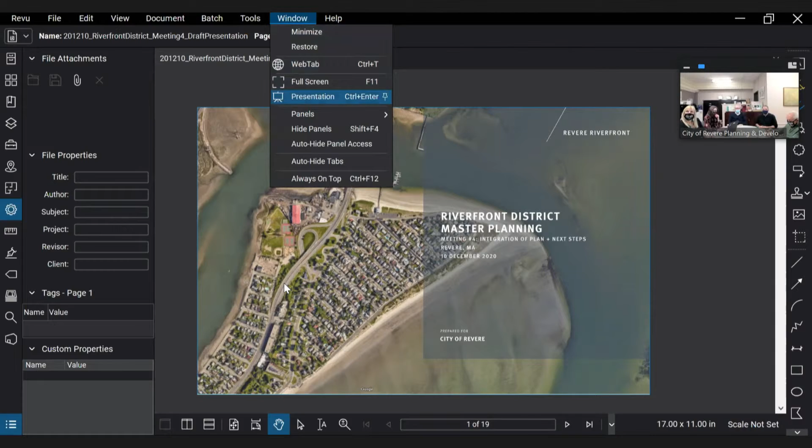It will soon be all yours. You should. All right, I was on mute. Oh, there you go, okay. We're all guilty of that.

Tonight, like we have done in the previous meetings, we're going to start off with what we heard last time, the key takeaways and how we addressed those. This being our final meeting of this group of 4 meetings, we're going to circle back to the overall master plan. We've broken things down at this point into components, and that's important because there are a lot of interdependencies in these different components, and we've tried to tie together the things that would potentially be funded or built together. Then finally, we'll talk about the steps to achieve the vision and the next steps we're taking. This is really the fact-finding piece that allows us to put together the master plan to move forward.

Last time we presented a new plan and moved some pieces around. Overall the programming of the park was pretty unanimously appreciated and liked. The one real big issue was the dog park, which we had moved closer to Thayer, and there were some concerns from the neighborhood, so we've taken another look and come up with another location for that.

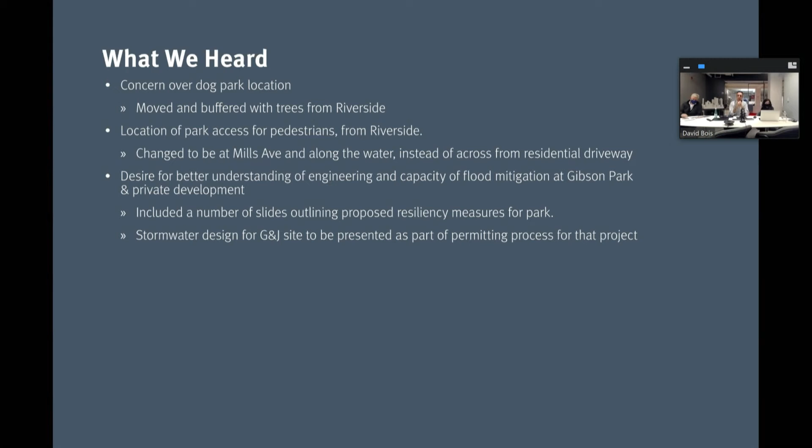So, as I mentioned, we have updated the plan a little bit. And Sean, why don't you walk through the changes, the few changes that are here?

Yeah, so I guess I kind of learned my lesson last week. I do want to take just a minor step back. I don't want to focus a lot on this. We can talk about the changes, but I know there's probably at least a couple new faces, and a couple people here tonight that weren't with us last week.

Throughout the park design, probably the big move, which gives us a lot more green and a lot more real estate within the park, was the reconfiguring of the on and off ramps off of 1A. Instead of the two big loops, this is all being developed and studied in conjunction with the new General Edwards Bridge. So as you look at the roundabout, it's the central feature, but what we really get out of that opportunity is some additional usable, programmable park space, which is what you're seeing in the upper right of the roundabout. It's a great opportunity for the park and the neighborhood itself.

That location, in addition to getting more green space, also allows us to really create a new front door, and it is the primary access into the park itself. It reroutes any traffic to Gibson Park that's not direct neighborhood traffic, to be accessed from Route 1A.

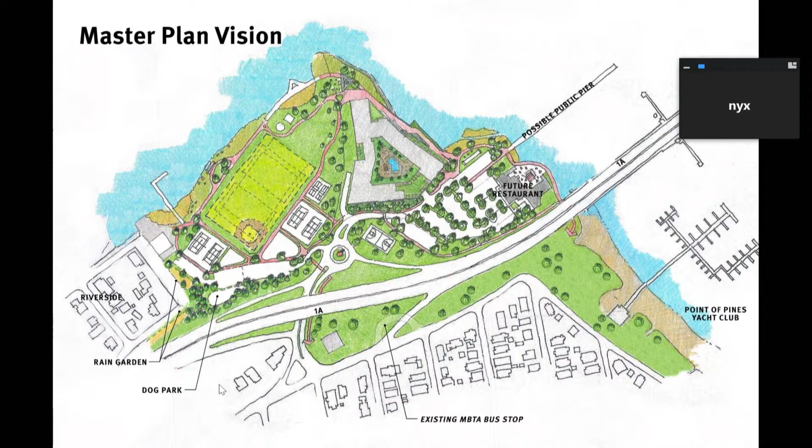We wanted to talk about the components, not in any particular order, because as we talked with the city, as things move forward, there's going to need to be flexibility about what could happen when. But there are definitely some pieces that could happen very quickly. In the community boating, there's a lot of momentum there.

The community boating is here. It's a renovation of the existing building, making it more resilient, more attractive to the neighborhood, and more welcoming. The thought is that facility could have restrooms open to the park as well. It's a great opportunity—a facility like this for kids and community, with classroom events as well as boat storage, would need those kinds of facilities, and designing them in a way that could be shared with the park really is a benefit to both.

So we just have some images of the activities, some images of the needs for the park and for the building, and some images of what the look and feel could be. It's an idea that the building itself could be renovated, have art, and be a very vibrant part of the neighborhood.

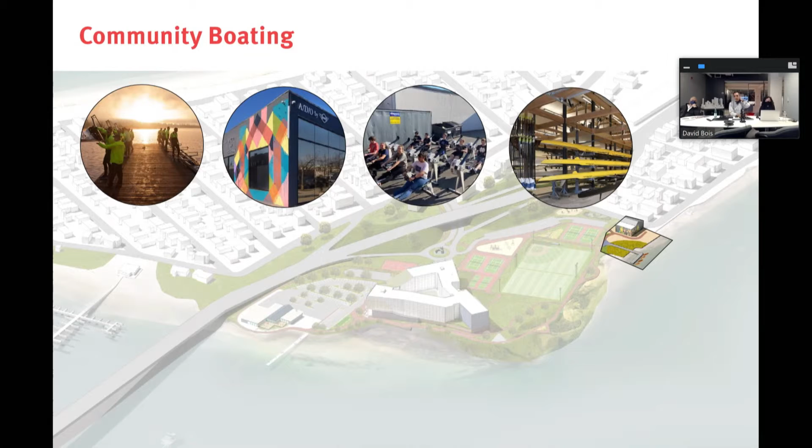The next component we want to talk about is really one of the major components, and you can see how much of the park area it takes up. It's the multi-use field, some of the tennis courts, some of the parking, but what's really important here is the stormwater management system. I'm going to let Jay and John talk about that in more detail.

Thank you. Nice to be with everyone again tonight. Last week people were looking for some more details—let's go back to that previous slide. To propose interventions with the stormwater system, we really need to understand what's going on in the existing condition: where the flooding's coming from, why it's happening.

So to provide a better detail of what we looked at, we took the Google Earth aerial and marked it up with the tributary drainage areas. That means looking at the topography—water just goes from high to low points. So we found where all the high and low points are, and looked at how, with the existing infrastructure on site, the water discharges.

There are really 5 tributary drainage areas within our study area. Technically there's a 6th, which is the North Shore Road, but that handles itself—it's got internal drainage and takes it away from our system. What we have is all catch basin and pipe system, your conventional drainage structure, where you capture the water, get it subsurface, and send it away till you get to an outfall. That's how things work all over the nation.

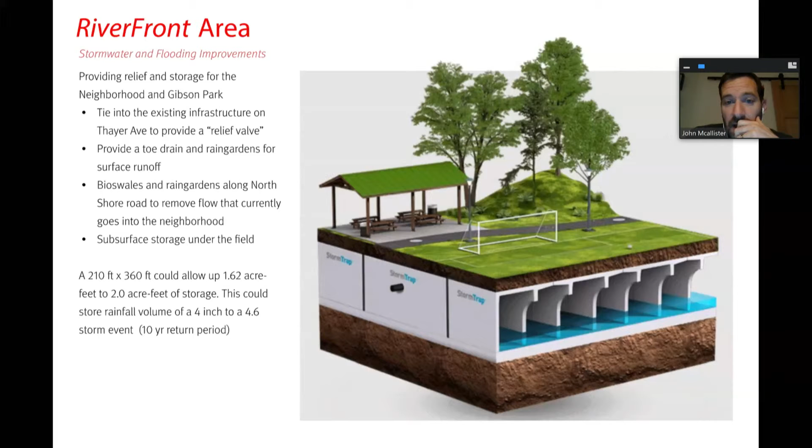In addition to that, we're going to have a toe drain and some rain gardens. We're also going to take off about 14,000 square feet of drainage area from the embankment coming off of North Shore Road that currently goes into the neighborhood, across onto Hayes. We're going to take that off with bioswales and direct it into Gibson Park and into our rain gardens and subsurface storage. So this slide is showing three different setups.

The top is what exists currently. As you can see, when the Pines River is low, at the lower end of the tide cycle, water goes into the catch basins and through the outfall and is able to freely discharge.

However, in the middle, as you can see, as the tide rises, there's a tide gate on it, and it's a flap, so that when the tide is open it allows discharge, but when the water comes and pushes pressure on it, it doesn't let the water come back into the system and flood the neighborhood. It doesn't allow the discharge. So we have a backup into those catch basins, into our pipes, and it has nowhere to go because it can't discharge into the Pines River. So it backs up and starts to flood Mills Ave, Thayer, Hayes, all that area.

So what we're proposing is, on that bottom slide, and it's a very simplified diagram, when the tide gate is closed and there's nowhere for the water to go, if you put in another drainage pipe into that catch basin, it can then go into our subsurface system, be pumped up, and you have a lot more storage area.

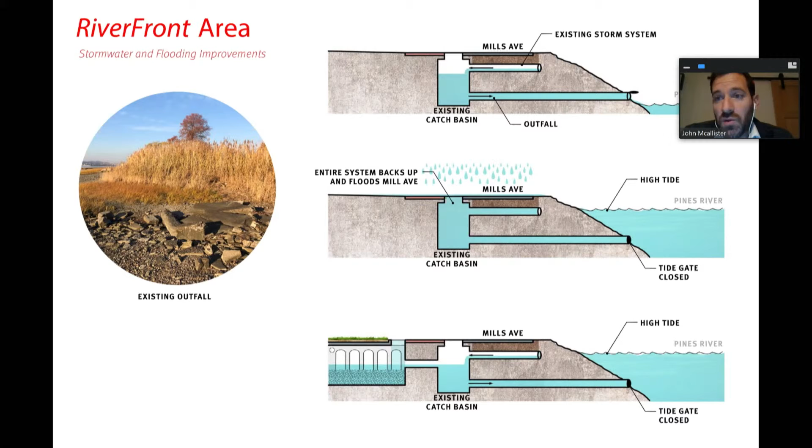Now, if we can go to the next one, how much storage area do we have? We have about 1.6 to 2 acre feet of water.

Now, what that means is if you looked at the boatwork site today as it is, that's enough storage that if there was 15 to 18 inches of water on that site standing alone, that's how much we can contain underneath this field here. That's what the big cyan picture is showing here. So it's a significant amount of water when there's currently nothing.

So again, in the current time, when it's high tide, there's nowhere for it to go. It just backs up to the lowest points. Here, we're able to move it, put it to a safe place where it doesn't have as much damage. We can get almost up to a 10-year storm. And that's just one of the pieces we're going to be proposing to deal with stormwater, with floodwater, and with resiliency.

So as you can see throughout here, I talked earlier about removing some of the drainage from North Shore Roads, and at the bottom, you'll see the bioswale. That's going to direct the water away from the neighborhood and towards our stormwater infrastructure where we have rain gardens, and we'll have overflows so we can go into our subsurface storage system. We'll have the toe drain.

John, Loretta Centra does have a question. Frank also has a comment, and I have a question as well, which is that the capacity under the field is a function of the grade level of the field itself. Conceivably, if we raise the field somewhat, we could increase the capacity. Is that correct? Yes. It's not to infinity because you're in the floodplain, but yes.

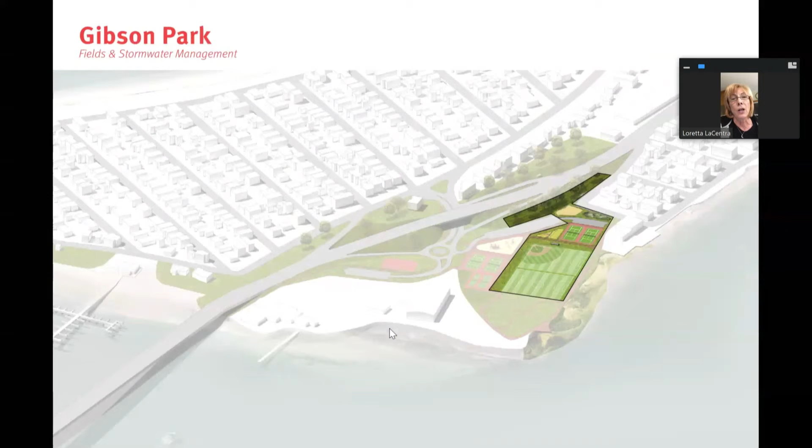What we have at the intersection of John Ave and Mills Ave is an outfall pipe that runs the length of John Ave. It actually runs underneath North Shore Road, underneath a landing that is currently in a state of collapse, and it is crushing that outfall pipe. We've been, and Frank, you may be aware of this, asking about this for years as to what can be done, because once it collapses, it will crush that outfall pipe. Yeah, North Shore Road will flood, because North Shore Road drains into that pipe.

I'm also aware of a tidal gate that you mentioned at River Ave and Mills Ave. I wish Elaine Hurley, if she's on here, could help me out, because Elaine, you've told me that floodgate does not operate. They installed it. Elaine, do you want to clarify? And then Frank has a comment as well. Elaine?

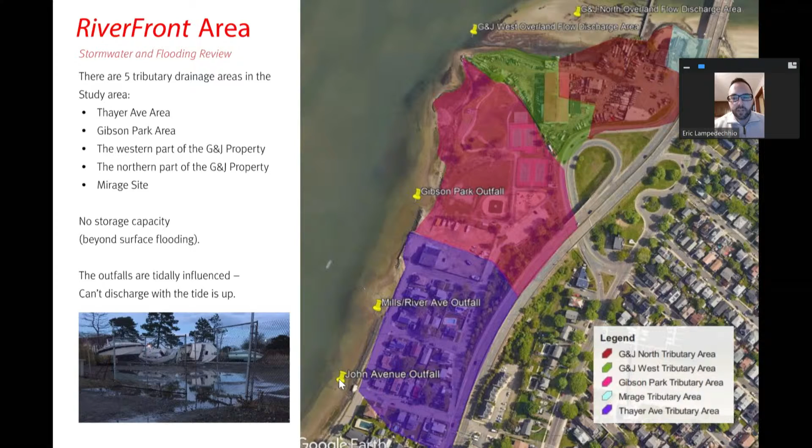Okay, I have another question too - it might even be an opportunity. Could you go to your other slide where it shows the ball field and the projection for the flood storage capacity? Was there any consideration to extend that even more north? So where that subsurface storage is listed, perhaps that could become enlarged by going further north underneath the additional green space?

Yeah, absolutely. So the subsurface storage is essentially a modular system. Most of these chambers are 3 feet by 8 feet long or 4 feet by 8 feet long, so you kind of piece them together like Legos. So you could, however, that's the lower part.

As we talk about raising up the field, that would be slightly lower - it wouldn't be low, but it would be lower. So you might not have enough grade to keep it, because you have to keep these chambers above the groundwater level. So it's something that could be looked at as the final design gets really developed, but it certainly is an opportunity. And we would look at bringing them to the south as well, if we could put them under the tennis courts effectively and shorten up the pipe connection to those as well.

Eric, I think the one thing we want to keep in mind, and it's a really good balancing act, is the placement of those underground structures - they really don't play nicely with trees.

So the ability to get some trees, I think, would be really great for the park, making sure that works with the storm components as well. It's definitely a very integrated system we're looking at here, but absolutely, those are opportunities to expand upon that storage capacity.

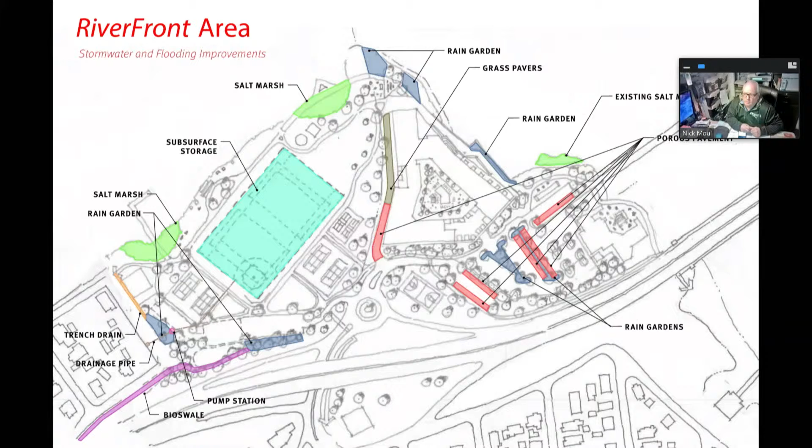Like I mentioned last week, and I had asked John last week, there's no storage there right now, so the storage they're going to put in is going to be a major improvement for this area. Then hopefully with the new project we're going to start talking about next week, MVP, I think it'll work well, and hopefully we can keep the neighborhood happy and not underwater all the time at every storm. But that's it.

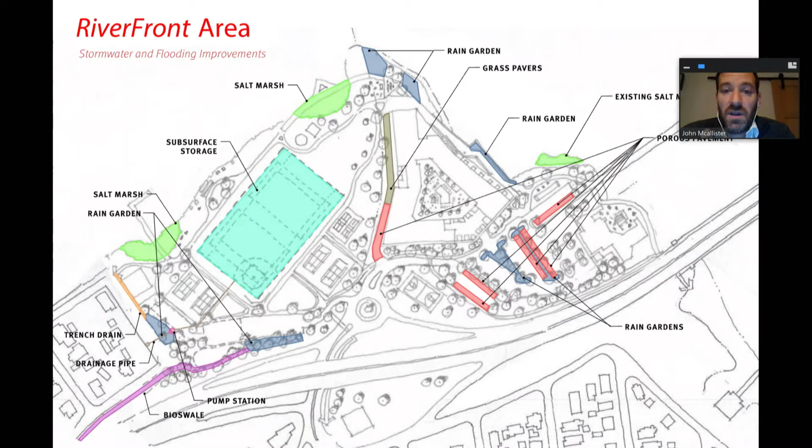I think we can go to the next slide. And if I could just add, as we studied this, we recognized it was a very complicated system with a complicated set of problems. We really pulled all the tools out of the toolbox to apply here. So there's both underground solutions with piping and storage, and surface conveyance of water, sculpting of land, and use of rain gardens, bioswales, and marshes. We've really integrated everything we can to try to maximize the improvements for the stormwater systems.

Yeah, it's a great point. Absolutely.

I want to talk a little bit about the shorelines and the water activation. Definitely one of the goals we heard early on was about the ability - you've got a great, amazing park, it's on the water, but the ability to get to the water, interact with it, and enjoy it from a closer relationship is a little bit limiting in its current conditions.

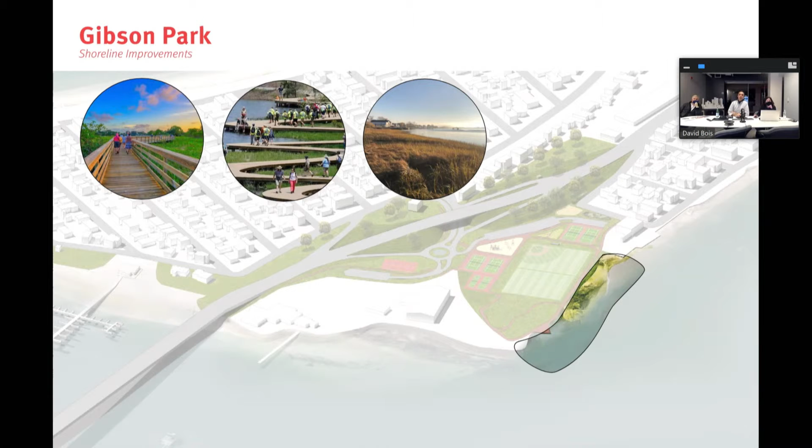So we touched on this earlier, the change in the access from 1A. The benefits there include obviously the additional parkland, but really the major benefit here is the change to the flow of traffic, really making access to Gibson Park available to everyone without impacting one particular neighborhood.

And then, as touched on a little bit, there's an underpass there that will become part of a pedestrian access point for the Point of Pines neighborhoods, and it's going to become the front door to the park. It's also going to become the front door to any development. So treating that underpass with careful attention, whether it's lighting or paint, making it a really welcoming and inviting entry point, unlike what we show in our rendering, which shows a black hole.

But I think the other thing to mention - we talk about paths, but the other thing we'd like to stress, whether through separate bikeways or multi-use paths, is to promote bicycle usage as well as pedestrian access to get to the park, and really keep the community aspect and easy access to it. It's basically an amazing opportunity.

John and David, I believe Eric has a question or comment. Thanks, Bob. I have two questions. The first is the access point to the potential development site and the retail component. Will that access point come down to the rotary? And why did you choose to come down to the rotary rather than leverage the existing access point?

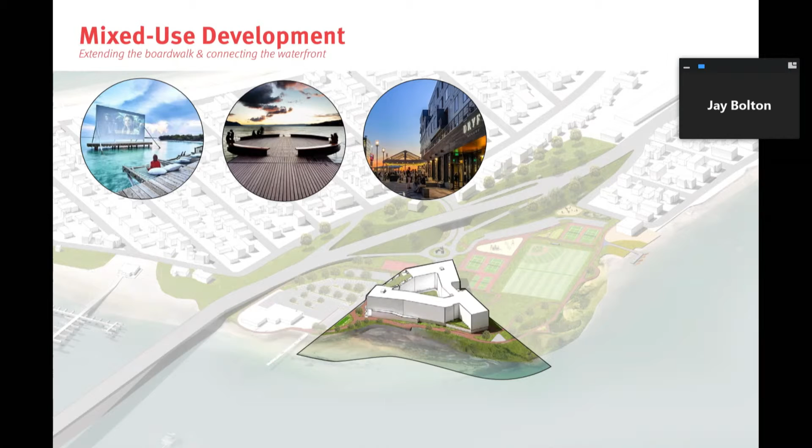How many parking spots, both underneath and to the side, are going to be issued for the building? I'm curious how many spots there will be. Well, I don't think there's been a final determination of the unit count, but it will be sufficient to handle all the residents. It would be in the range of 250 to 300 spaces, let's say. Okay, gotcha, all right, thank you.

Okay, Representative Vincent. Yes, hi, good evening everyone. I just want to share my two things, number one, which I mentioned at the meeting a couple of weeks ago.

The parking, I'm very concerned about it, especially because the Riverside and Point of Pines neighborhoods are really inundated with cars right now. They don't have enough parking as it is. Even though they supposedly have resident parking, it's really not, because it's only from midnight to 6 o'clock, and that would not really help the people in Riverside or Point of Pines. So parking is a real concern to me.

Number two, both Riverside and Point of Pines are very single-family neighborhoods. I love the idea of the park in that whole area, if that's where it's going to concentrate, but I don't understand why we would be trying to put the Pines and Riverside sections of the city together. Why would they be integrated? What would give anyone a reason to go into the Pines? It's a private neighborhood. Why would we want to integrate the new development with Point of Pines or Riverside? I'm not understanding that.

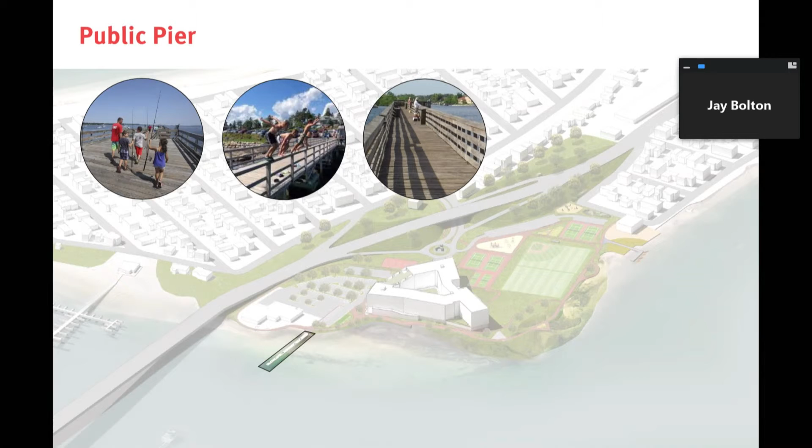Thank you, we certainly do that. I might just note too that the access under the bridge along the waterfront is identified as a potential access because it is an issue that needs to be discussed with the community, number one. But number two, as a practical matter, that can't even be contemplated until the new bridge is in place, which could well be a decade or more away. So it's not an immediate threat if it's perceived as a threat. And if it becomes an opportunity, it will be implemented after the new bridge is up and running.

So Bob Mara, I believe you had a comment as well? No, I think I'm going to refrain. This isn't the forum for a debate about Point of Pines issues. I'd rather hear more about what the developers have to say consistent with tonight's agenda. So I'm going to withdraw that.

Okay, very good, David, it's back to you then. Sure. So part of that private development site and part of the G&J site is actually this public pier that we're talking about. And I know Redgate and the city are in discussions about trying to figure out the best ways to actually develop that, bring that back to life and make that a public amenity as well. We just have a few images of probably a fishing pier because of some of the other constraints on that, but definitely a lot of study that needs to go into that, but that's something that will be coming in the future as well.

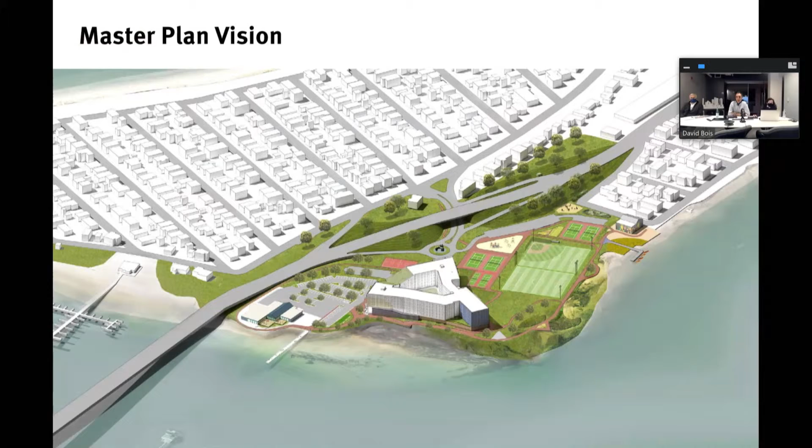David, I believe Lisa Pedersen has a question or comment. Lisa? Hi, can you hear me? We can now, yes, go ahead. Thank you, I want to go back to the roundabout if I could.

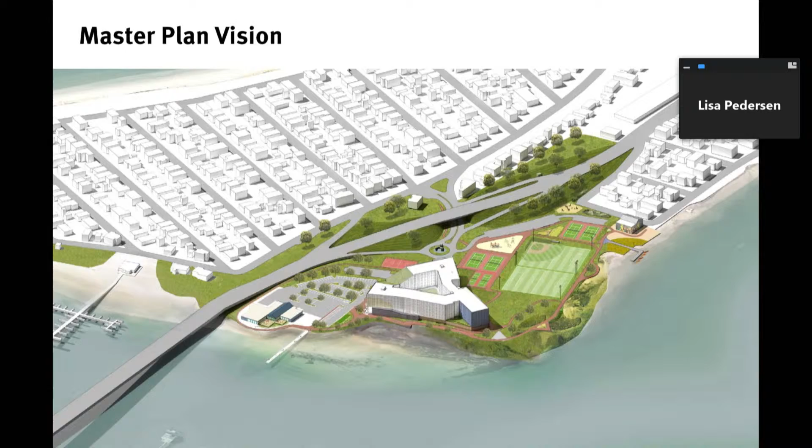Sure. So I think this whole thing is overkill, and I'll tell you why. Because if you're talking about the bridge being elevated 10 years down the road, I think it would be less construction and more efficient if you continue to use your entry and exit that you have right now. You could cut a path, a road from where you guys are down to where the parking at the park is, which would eliminate all these on-ramps and off-ramps in this roundabout. And it would make everything safe. You wouldn't have to decelerate for the state.

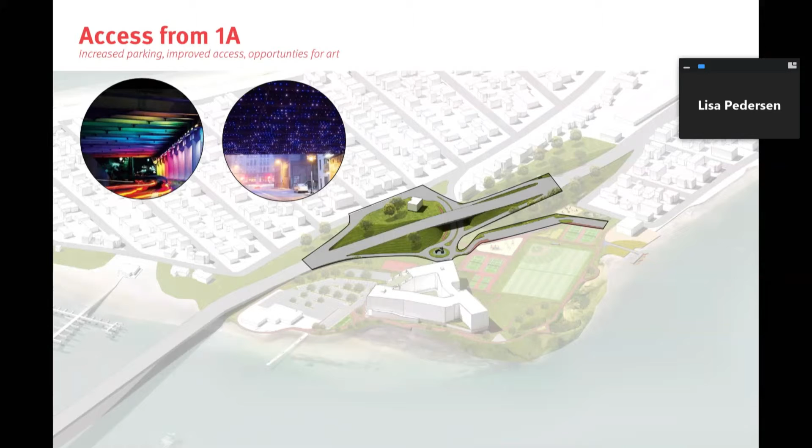And as far as the traffic study that you did and the people leaving from the roundabout southbound, hopefully exiting before Thayer Ave and the neighborhood, that's a blind downhill 45 mile per hour slope. At the bottom of it, about a block away, is a crosswalk. So everybody on the other side of 1A that's going to take the bus, especially now that they're going to eliminate that other bus stop, is going to have to cross that crosswalk in front of a bunch of cars that already aren't looking, and now there's additional cars that aren't looking. Not to mention that when you did the traffic study, all the people on the beach side are now going to have to come under that bridge and go down that same thing. So I don't know if that was included, but that's a lot more people, and I don't see the necessity of it. I think everything's set up just fine if you would just expand the road from your entry straight to the park parking.

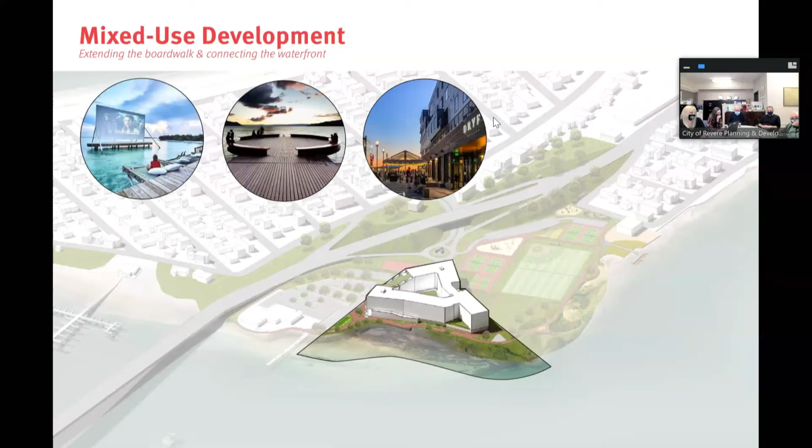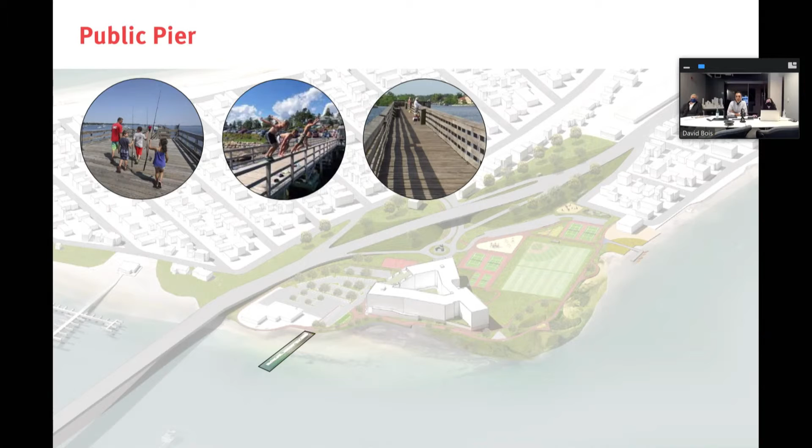Thank you, Lisa. David? Yeah, I mean, the only thing I can say to that is that I'm not a traffic engineer. This is going to be part of a Mass DOT process of what Mass DOT feels is the safest and best approach to this interchange. And some of those traffic numbers that you're questioning, Lisa, are actually coming from the state traffic report, state of congestion. So this whole roadway has been flagged by the state itself as an area that needs to be improved. Well, that doesn't surprise me.

So we want to talk about the next steps here. John Powers tried to bring this up, and Rosalie Vincent tried to bring this up, and you guys keep pushing off saying you don't know what the traffic commission is going to say, and it's going to be up to the safety rules, and we're going to have to see what people think. You're just skimming over it, and I don't mean to be pushing about this, but it's important.

You're taking everybody from the beach side and forcing them down this little exit ramp. They can't turn at Oak Island. They can't turn till Revere Street, which they already know is going to be backed up. There's really nothing wrong with the way it's set up now. And it sounds like you don't even want to entertain it because 10 years down the road, someone might have to lift the ramp into the G&J property.

Well, let me just say, first of all, Lisa, all of these issues will be discussed and studied and evaluated in the course of the planning and permitting process that is yet to come. But the one thing that this does solve is the traffic problem for the Riverside community, because right now everybody comes into Gibson Park via Mills Avenue, and that is just not acceptable.